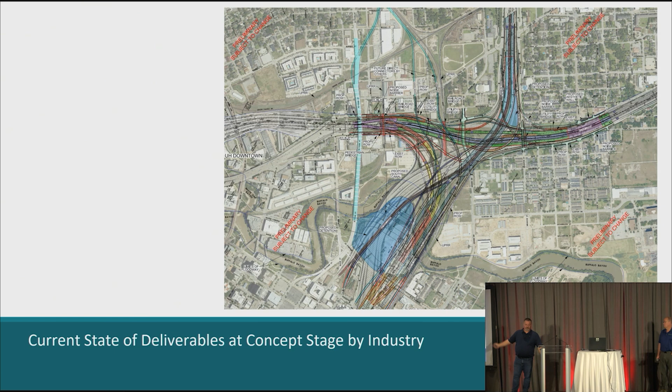I want to give you a journey, the story of our journey. This is an actual project in process right now. 2 months ago, we were given this by an agency, and they said this was done by another design firm, and this is actually a very large interchange, and we were asked to do quantity takeoff for a system interchange. The engineer of record had horizontal and vertical alignments in an existing ground, but they did all the graphics in 2D, and they didn't have a model.

Well, our process is, let's leverage a model for everything. So at WSB, everything we do is now model-based, using Bentley software and Bentley technology. It does many things for us. You've seen design review, or constructability review, which I prefer to call it. We can go through and you can see things that normal people would miss or wouldn't catch.

Also, you'll see all those little glyphs. If you haven't used SYNCHRO Control or Bentley Infrastructure Cloud, all of the locations for all of the issues. So geolocation is important. Finding it early in the office makes it easier to resolve.

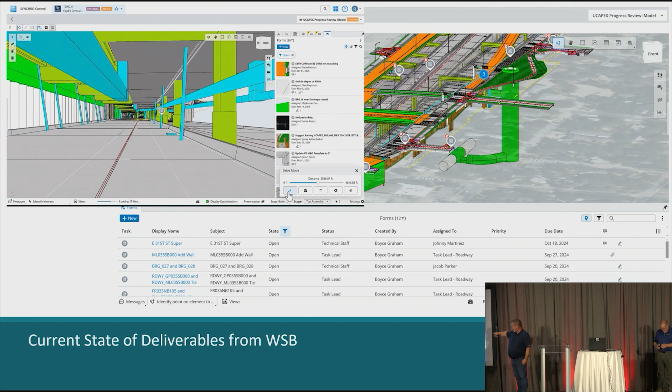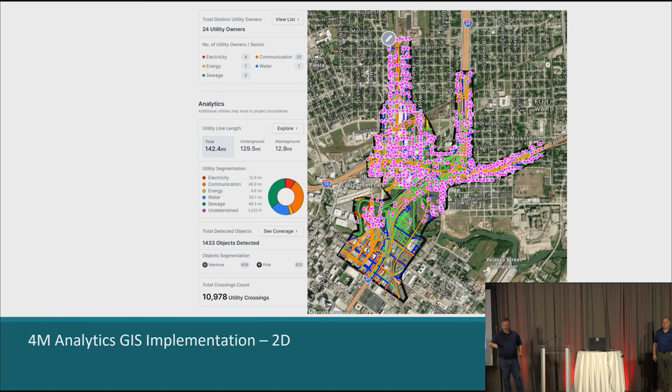Now with that, we wanted to leverage our partnership with 4M Analytics. They allow you to draw a boundary around your area, and it pulls in all the GIS data. Fantastic data, very structured data, but it's flat in 2D. So we built a process to actually turn it into 3D. So what you're seeing there is the left side is what we get from them, fantastic data, but we put it over into 3D, and we've done this very, very quickly.

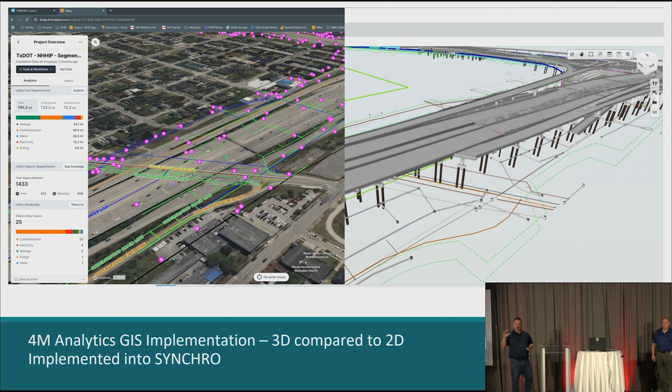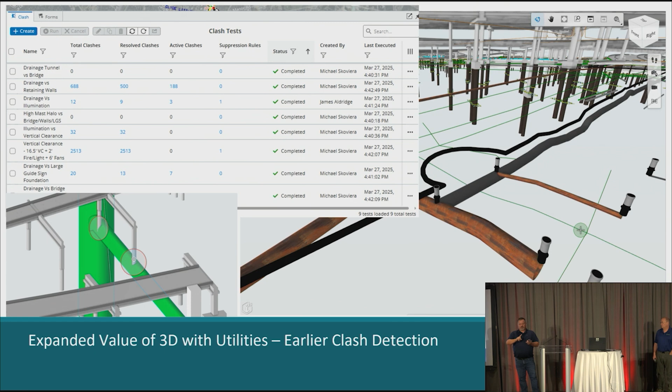We used AI to help us. We used Bentley tools. So we end up with a very realistic current conditions of the utilities. So now we're doing clash detection early. You'll see here the workspaces are so good. Ductile iron pipe shows up as rusted pipe there. So we're getting good information, we're making it 3D, we're getting very accurate models.

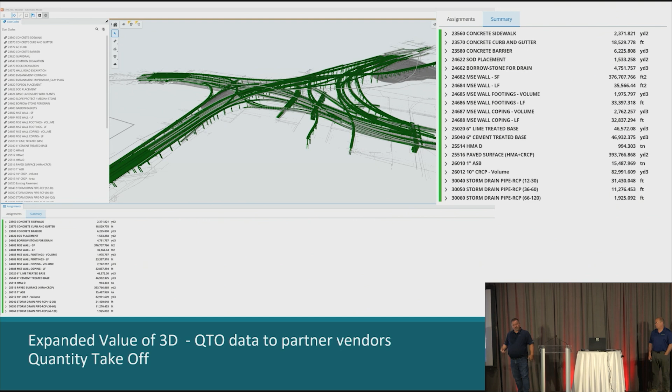Now with this, it drives other processes most people don't think of. So we are doing quantity takeoff. So we use the model to drive our quantities, but engineering quantities don't necessarily equal construction quantities. So we put in the construction cost codes. So we have a breakdown. What it does is it feeds that data to our other partners like HCSS. So we put this information in, and then we actually put it to duration and the equipment and the people.

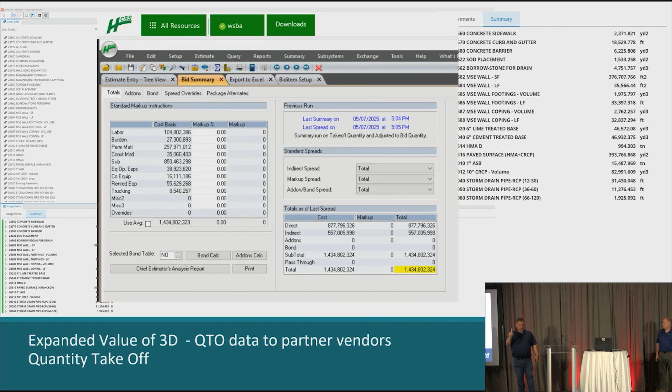So we know now that this project's $1.4 billion. It's pretty accurate. So with this is a big project. We did all of this in less than 2 months. We actually built the model in 2 weeks. We did the utilities in 3 to 4 days, quantity takeoff in 1 day, and the 4D schedule that's derived from this now. So this is a time determination schedule. So it's a data-driven schedule and duration for that project.

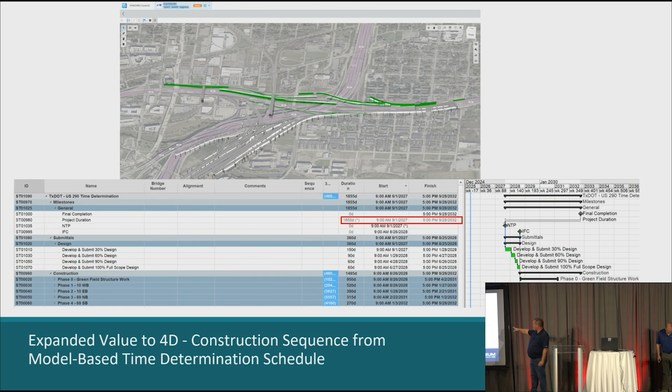But with this, 6 months ago, I used to work with Mr. Bill McNamara. He and his team at Bentley gave us access to the proof of concept iTwin viewer that has Cesium built into it. And it was a game changer for us. It absolutely changed how we did this.

So we got permission to show it to the client. So we took that same project, you'll notice the skyscraper in the background, and we had all that nice model data that's very accurate with utility data. Now the designer on record said, oh, we're not hitting the right-of-way for the railroad, we're not hitting the existing roadways, we can build this.

As you can see, we have bridge piers right in between the railway. You don't see that when you're just looking at the traditional imagery from the top view, and even if you go at the side, it's not as good as the Google 3D tiles. So my boss left this up there and let them just dwell on this. So now it's actually changed how in the world they're looking at this. And the comment was, this is what we expected a digital twin to be, because it's simple, it tells a message, tells a story.

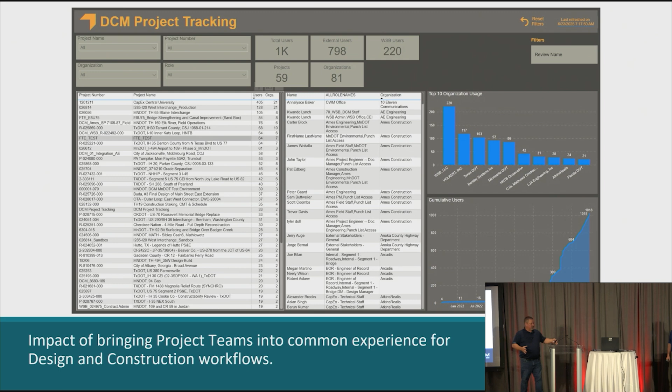So you see our usage, and as Bill and I were preparing, some of the biggest users are DOTs. 3 or 4 out of the top 10 are DOTs that are not using it on their own projects, they're using it with us. This is a big thing. The growth in the last few months, we do contribute to that cesium integration.

So when we set out to do this, when Cesium was acquired, we looked at it and said, okay, what do we do with it? One of the challenges we were having was Bentley historically has always been engineering, and we focus on the design. So we had iModel viewers, and it gave you the ability to do incredible things, clash detection, animations, viewing, schedule, 4D, all that stuff, relative to an individual model. But as the community has evolved, it's become more important to see and understand how things relate to each other, how all the projects come together.

Our designers typically work on 6 projects a week, but our system was based on projects. They had to go to each project. Now we have the capacity to look across all of our projects. If we consider a digital twin a container of data, it can be anything from a PDF to Esri GIS data to photos to PDFs, including a model. We now have the ability.

We modified the viewer using the Cesium technology to go from an iModel viewer to become an iTwin viewer, basically a digital twin viewer. That's what Corey and his team are using, and we partnered with them very early because we wanted to get some real-world examples. That viewer now, instead of just looking at a model, looks at the entire context of a project, and looks at the entire context of multiple projects together, an entire portfolio.

So when I have the Philadelphia waterfront, I have 3 separate projects. I can see them all simultaneously. I can see what's been assigned to me. We currently track the project boundaries, the iModels, the photos, the PDF plan sets, because not everybody has a model to start with. We do the reality meshes, all the point clouds, all the reality, all the spatial data, the Gaussian splats that you saw, all of that stuff is in there.

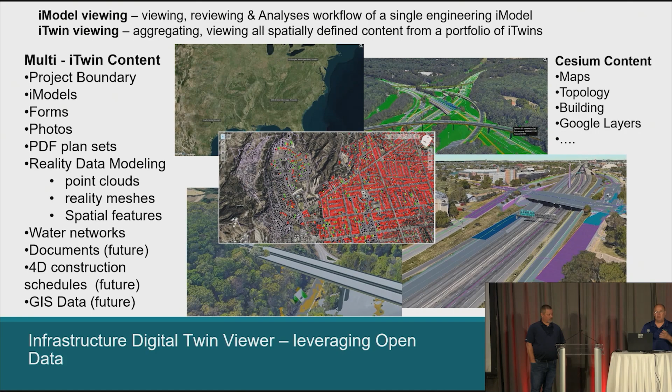So imagine all these great Cesium things that we've seen developed here today. They are, for the most part, point solutions. I want to consume every one of those. If it's built on Cesium, I want to have a way for you to register the Cesium data source. If you need credentials, fine, we'll add those. And have that data display here, not as a deep integration between the products, but as a UI integration, so that your data is seen in context. So what he's going to show you next is what we did with them.

Now I like this graphic because everyone talks about eating the elephant. Some of the biggest projects in the world are infrastructure projects. Corey just said $1.4 billion. The design's going to take an additional 2 years to finish, and then it's going to take 5 years to construct it. So we're looking at mid-2030s before that project is even done. And that's one of about 60 projects his company is working on. So these projects are giant elephants. And if we can do anything to bring the data together, to aggregate it, to make it understandable and relatable - not only to the engineers, but what we're finding is with those 80 organizations, it's making it relatable not only to the engineers, but to the owners, to the consumers, to the individual people. We're even looking at a way to make this so it can be presented to the public.

That's the big push for the DOTs. They want to be able to take these models, put it out for public comment, and have everybody be able to democratize this data. So with that, I'm giving it back to Corey.

All right, so right now, I've been along with Bentley for many years, I love their stuff. What you're seeing here is a project here in Pennsylvania. We have GIS data, we have reality data, we have our PDF plan sets, we have our issues, we have quite a bit of information there. What's nice about this experience is, like Bill said, we want to look at a programmatic view. I don't want to go into individual projects and go in and out, in and out to different projects, which isn't bad, but we're starting to see this bigger picture.

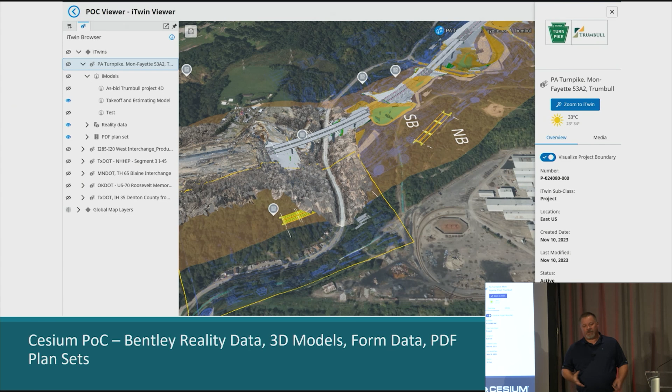What's nice is if I click on that PDF, I get this in-app experience and I can mark up the PDF and I have that, which is great. But that's because we're using the Bentley technology.

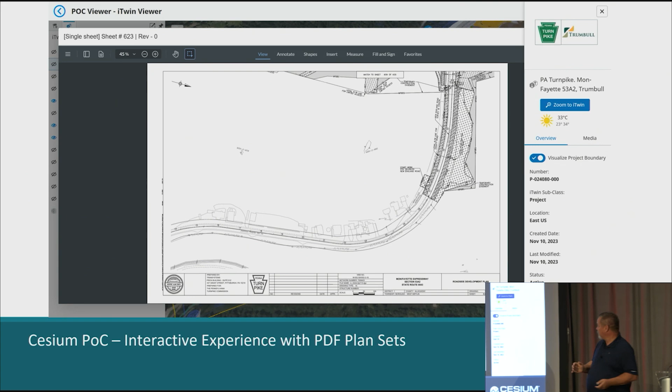What if we're not? Here's our view, and it seems very subtle, but if you look along the left side, way down the second from the bottom, you'll see Headlight data. Now, what we worked on in the last week was getting this integrated in so that we can have that same experience that you just saw with the interactive PDF with an outside company partnering in. So we have with us today, it was all very quick, but we have Stephen, the Chief Technology Officer from Headlight, up front, if you want to talk with him. He can tell you, I was actually in London on work, so I had him work with Bill and a few others, and it didn't take a lot of time to get this to work, correct?

But what Headlight does, just to give you some examples, and I'm gonna butcher it because it's way more elegant than what I'm gonna say, it is an actual daily collection, forms, photographs, but they're collecting a tremendous amount of data in a very elegant way. They're collecting all of the photos with tags, geolocation, very data rich. This is important. Like I showed the constructability review, we want to get that information to the person, have them resolve and get it back. Same within the field, which is what we're going to get with Headlight.

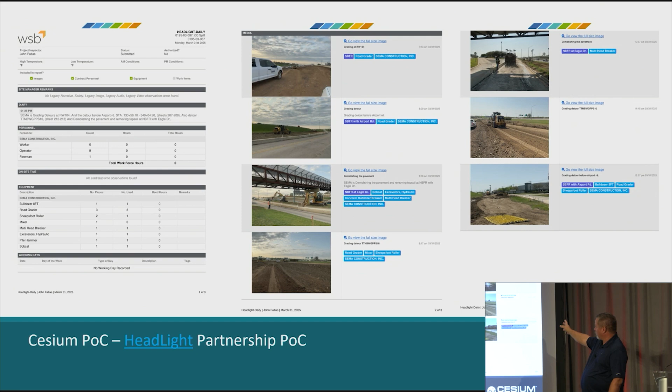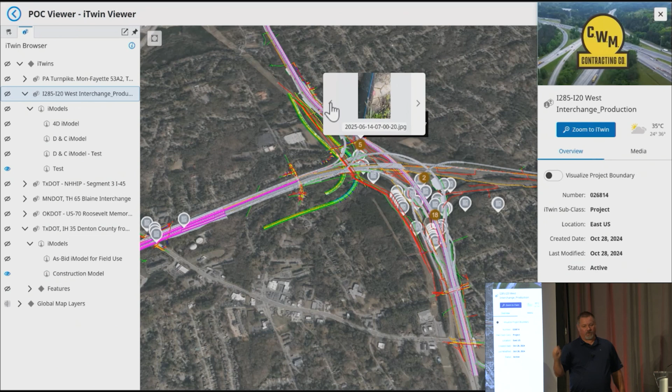So this is some example data from that actual project. So here's what I want. This is what I asked for from Bill two weeks ago, and it took another week to get everybody together. But right now, we can see this. This is all within the Bentley project, and I want to be able to flip through the photographs. I want to be able to open the photographs and have that very interactive experience in one environment, because that's what our users would really love to have. I can pan around, I got the model-based experience.

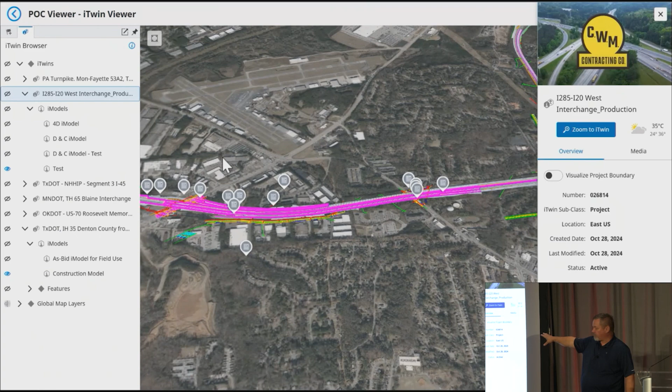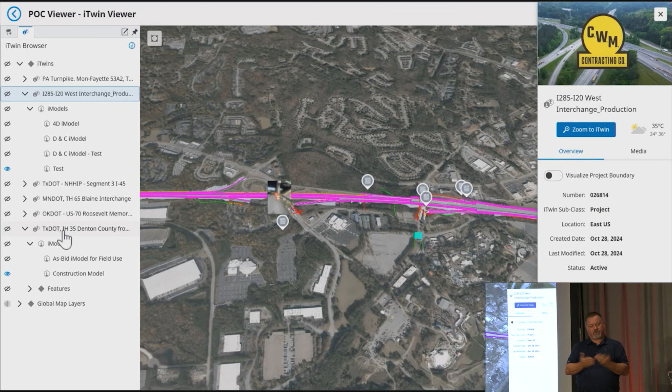Headlight doesn't tie to a model at the moment, but we can provide that geospatial context. So I want to be able to actually look at this. So here's our actual project, and it's not as polished as we want because last minute, but we're going to flip over to an actual live project. These are not mock-ups, these are live projects.

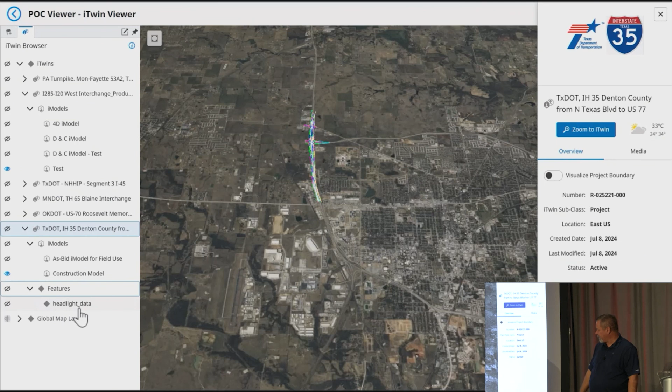So we have a model on this project, and I'm going to go ahead and turn on the headlight data. And we don't want to build our own viewer, we don't want to build all of this. We want to be able to leverage commercial off-the-shelf from Bentley. That's our base standard. But for construction, you have to be able to connect and have that information from others. So as you saw there, when I clicked on those items, it tells me the data. Well, we think we'll be able to get that interactive experience and see the form, see the photographs, leverage their search and filtering capabilities, because the data is really what's important.

And just for context, one of the projects, it's common, 700,000 photographs. When the project's done, probably 2 million or more. How nice is that, that we don't have to leave and tell a contractor, I got to go to this website for this, that website for that. We can post it here, but when I find an issue, it takes me right into the actual information, and I'm not having to jump all over.

So in the end, that's our hope and dream. I love the fact that we got that in, and like Bill said, we're hoping this sets the future. I have about 7 or 8 other softwares that are fantastic point solutions that I would love to be able to surface up here, and we provide this to owners, agencies, subcontractors, contractors. Everybody can come in, and I want our usage to keep growing like we had before.